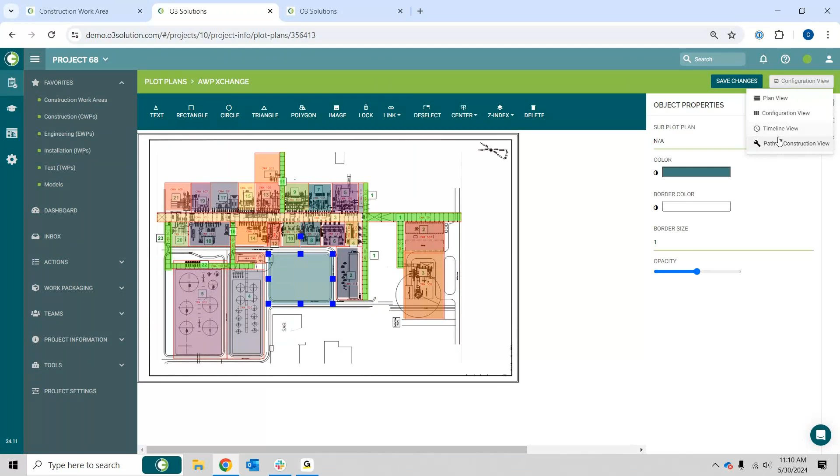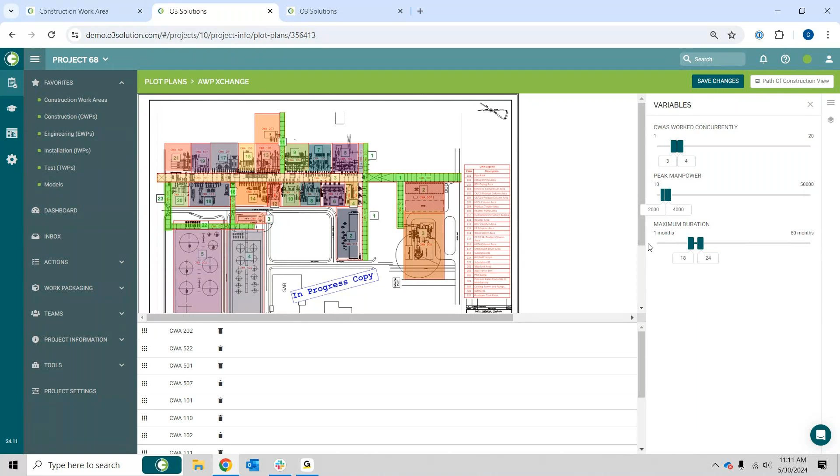Once we have our boundaries defined, we can swap over to our path of construction view to create the first path of construction. Here we select our rough sequence of work that we want to execute. Once we have our rough sequence selected, we can adjust key sequencing variables like the number of CWAs we work on concurrently and the total maximum duration we want for the project.

Once we have our input selected, we can use O3 as a co-pilot to generate an initial path of construction for us to review. Users can then play through this path of construction on a day-by-day, week-by-week, or month-by-month basis and see what will be in progress or complete during a particular period.

If at any point I want to adjust my path of construction—maybe swap the order of two CWAs—I can flip these two CWAs and hit Save Changes to make adjustments. The idea here is really to take a traditional whiteboarding process and make sure we're executing it in a manner that's as quick and easy to adjust as possible. Andrew, is there anything you wanted to add here?

Most of the construction personnel I've worked with in my career have been very visual people. If you give me a 200-page schedule and say here's the order we're going to do this, or a big long written document with the plan written down, it's very hard to visualize. Whereas having this early phase path of construction as a visual tool, something you can easily modify and play through, saying well hang on, let's pause it there, gives us a great amount of flexibility and intuitive understanding of the intent.

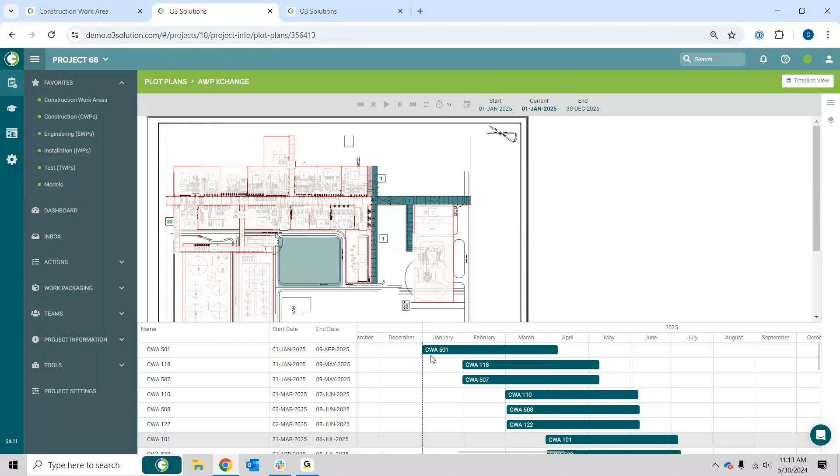So once we have our initial CWAs defined, we can go through and break these down by discipline to create construction work packages. Here down the left-hand side we have our list of construction work areas, and across the top we have whatever disciplines we've defined for our project. Here we define which disciplines are applicable for each construction work area, and use this to generate our CWAs, CWPs, and EWPs.

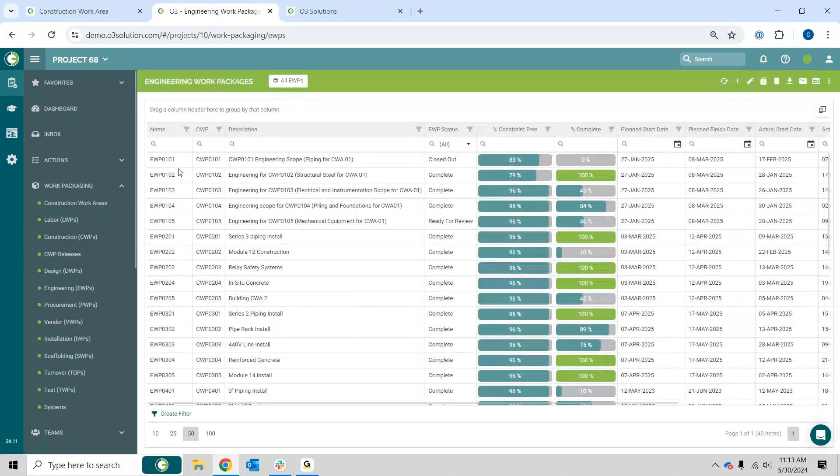As we go through and generate our construction work packages, we also generate corresponding engineering work packages. On the engineering work package side, for clients earlier in their AWP journey, this can be an easy way to group engineering deliverables and understand the progress and completion of engineering and readiness for construction.

Here we'll pull in the MDR of our drawings and documents and their relationship to the EWPs to define what documentation needs to be delivered for each engineering work package to be completed. From there we interface with the document management system and EDMS to pull over progress and status information. This gives us a good view of where we are in the progress of each EWP, making sure we understand our current status and whether we're ahead of or behind schedule, and whether we'll meet our need dates for construction.

From here, the next piece is to go through and consider potential constraints on engineering. The idea is to look out for any potential blocking items on engineering and move this from a finger-pointing and blame exercise six months after work has begun, to a more proactive conversation about what we can do to remove those blockers and make sure engineering can be successful.

These can be anything from geological surveys, geotechnical investigations, information we're waiting on from a vendor, concurrent engineering activities, open RFIs or technical queries, or input from the owner. Any of these can be tracked as constraints and removed to make sure our engineering work is successful.

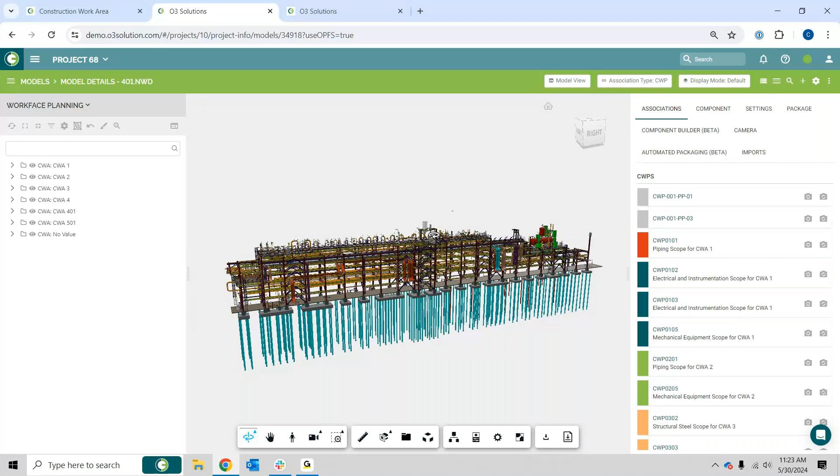Thank you, Chris. So as we have all this data combined in our model, our planning teams can come in and add, create installation work packages, and build out their scopes of work. As a workface planner, I can come in and my hierarchy on the left-hand side will automatically reorganize around construction work areas, then disciplines, then construction work packages, and installation packages.

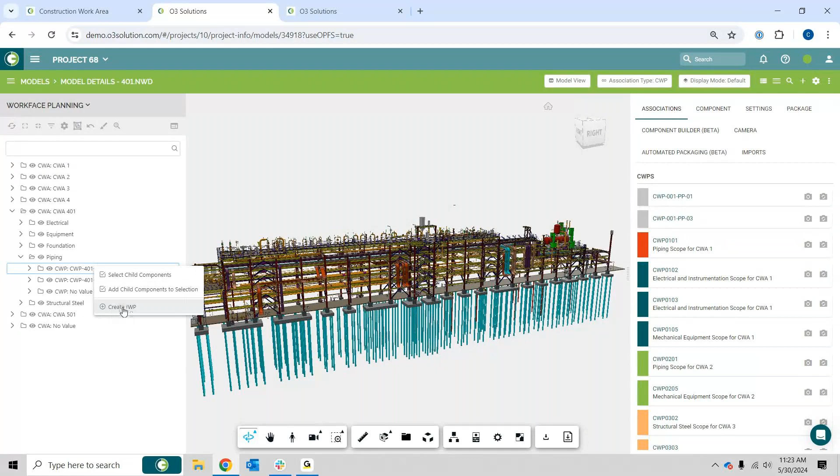I can go through and spin up a new IWP quickly and easily. As I create this IWP, the 3D model automatically filters to the components on my parent CWP and gives me color coding: green if these components are available to add, blue if they're on another package, and purple if they're already in my package. I also have additional status visualizations that give me information on material availability, fabrication availability, and drawing availability to help guide that process.

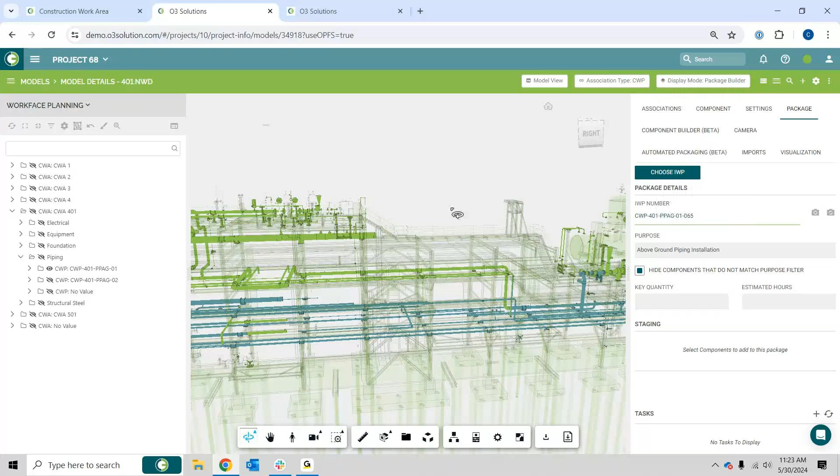From here, I can select individual components or do a bulk select to try to grab about 1,000 hours worth of work, or whatever my crew shift is. For creating these one-off packages, I can go in and select the components, add them to my IWP. Then, as you'd expect in a modern packaging tool, this brings in all the associated materials and drawings that we need, picks out the right tasks and the right quantities from the 3D model in order to do our estimation, and really automates a lot of that initial planning.

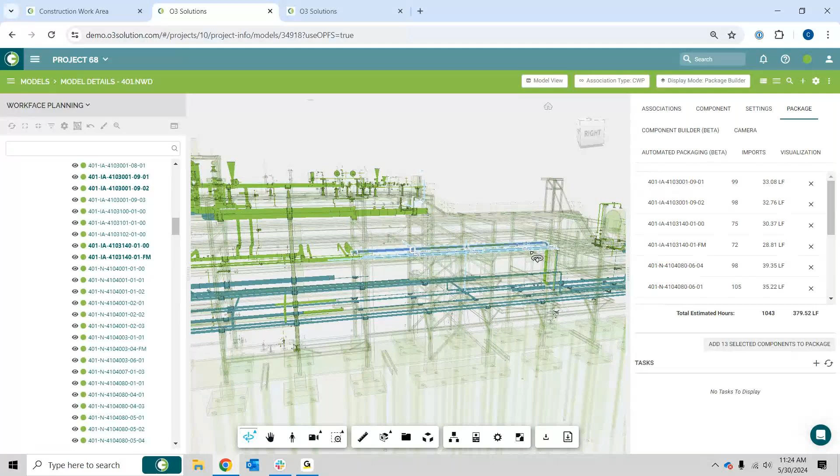Within O3, we can also take this a step further. For some disciplines like piping fabrication, we can go through and start to break these construction work packages down into installation work packages automatically. The goal here is to provide a co-pilot for the workface planner to help with that initial CWP breakdown. So here I can go through and pick a construction work package and break this down for fabrication.

We can give it a target IWP hours and a tolerance, and then determine whether I want to make sure that all of my drawings and materials are available. Once I hit the Generate Packages button, it'll give me suggestions for different groupings of IWPs within the CWP in order to begin doing my planning. I can go through and review this, make sure the breakdowns are appropriate, and then use this to quickly generate my packages.

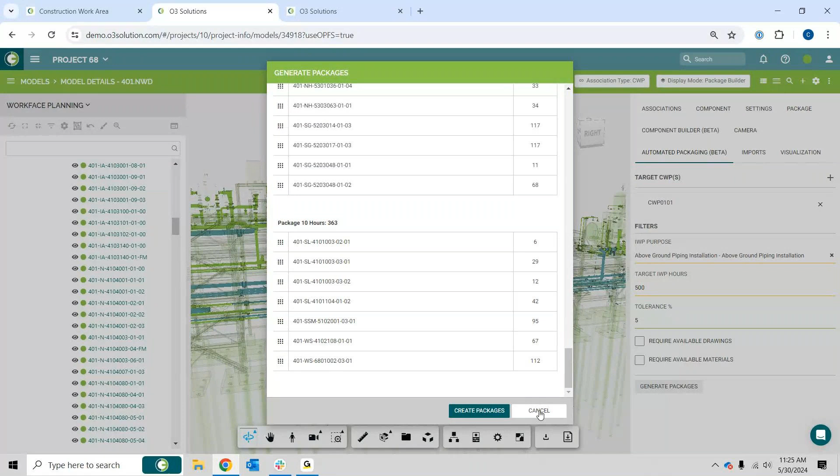For disciplines like piping fabrication, the specific constructability guidelines are less of an input, but as you can imagine, with things like steel, there's more logic behind this as we work from the primary steel structure to secondary to tertiary, work from the bottom to top, left to right, and other logic in the background to make sure the auto planning is useful. Andrew, is there anything you wanted to add around building these packages from the model, either manually or automatically?

Yeah, so most of what we do with workface planning is the planner trying to make the work of the field crews efficient. Most of what we're trying to do by digitizing this is to make the work of the planner efficient.

So we're trying to get away from the days when a planner had a stack of drawings sitting on their desk and had to leaf through them doing manual material takeoffs, manual quantity takeoffs, Excel spreadsheet man-hour estimates for the IWPs, and typing up information for the materials team to have a pick ticket. All of that becomes digitized and embedded within the tool.

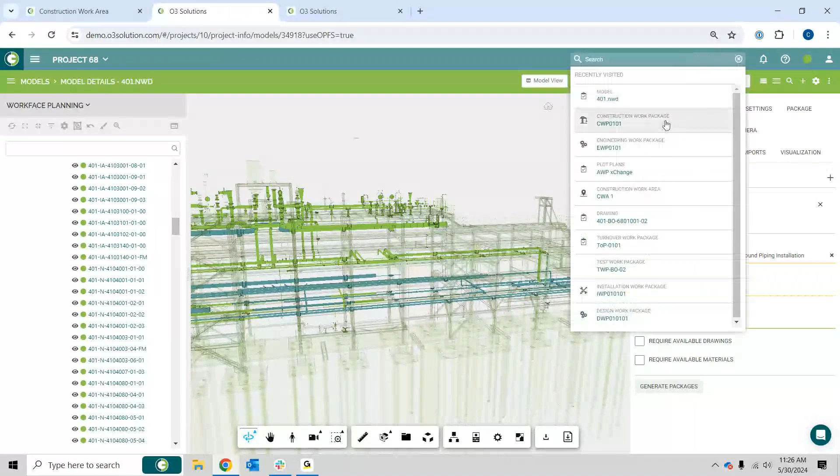So if I select 3 or 4 isometrics and click Add to IWP, the system will automatically pull the correct drawings, create the material list, estimate the man hours associated with it, create a list of constraints, and create the execution tasks. All of that is done automatically because of the setup of the tool. So the work of the planner becomes much more about managing and overseeing the execution of it rather than having to do a bunch of tedious work to build these packages.

Thanks, Colin. Thank you, Andrew.

So as Andrew was alluding to, the initial creation of these packages is largely automated. From here, we can go through and add additional information that might be needed, additional safety documentation, quality documentation, and additional notes and references as needed.

From here, we go through and do automated constraint checks, interfacing with the materials management system to make sure that all of the materials are available in sufficient quantities. We don't have a materials management system in play, but O3 can consume your material inventory data and do that constraint analysis for you.

We also interface with document management systems to go through and make sure all of our documents are available in IFC and can be included in packages. We can interface with things like permitting, and we'll do some automated checks to make sure that our scaffold requests are closed out and that scaffold is available.

Additionally, we'll check for any incomplete predecessors and can go through and create standard constraint lists with the appropriate assignees for other things like crane availability or equipment availability, to get appropriate input and buy-off to make sure that our work can hit the field without delay.

From here, we can move through a standard approvals lifecycle, make sure that this work is ready to go, and then it can get issued to the field in the form of an IWP.

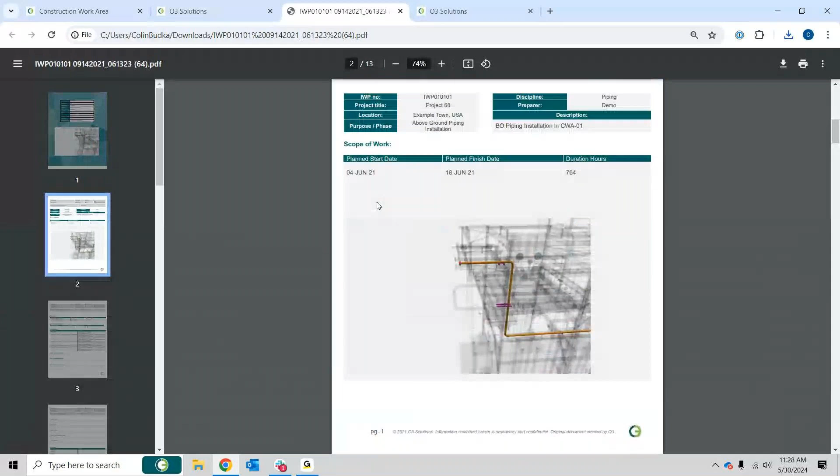These IWPs can be issued out electronically or printed out as a paper copy, and these can match any look and feel that you like. They can include everything from manpower lists, material lists, work steps, specialty tools and equipment, and the drawings needed for execution. Any of the information that you have within the system can be brought into these IWPs.

Once the IWPs are issued out to the field, we can receive feedback. This can be in the form of progress data, behavioral-based safety observations, and any delays that are encountered in the field. We can also go through and generate punch lists for anything that needs to be executed later.

We can collect these either electronically directly out in the field, or we can work off of a paper copy or PDF copy of the IWP, write our progress and field updates directly on it, and take a picture and use AI and OCR tools to automatically convert that into progress information. So if you have devices out in the field and are ready to do this electronically, it's fully available. If you are working off of paper, we can still go through and leverage some of that same automation.

Chris, is there anything you wanted to add on the IWP process?

I'd just like to highlight that AI functionality within the software. Back when we were in construction in the fields, what we would see a lot of is a mixture of tablet forms, but not everybody had a tablet. Being able to utilize the AI functionality and OCR, taking a screenshot of that progress, allows the project team to keep up to date with the progress tracking, and allows you to get that instant feedback from the field on a daily basis, so you can know exactly where you're at with your project, as well as any kind of constraints that may be coming up on the project.

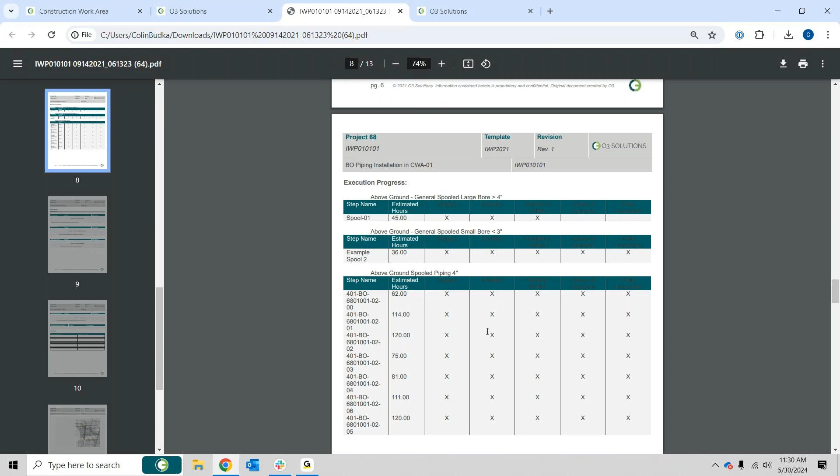Thanks. Thank you, Chris.

So as we wrap up our IWPs, the progress information and field feedback also rolls up for reporting. So both through dashboards and also through the 3D model, we can see key information from our project.

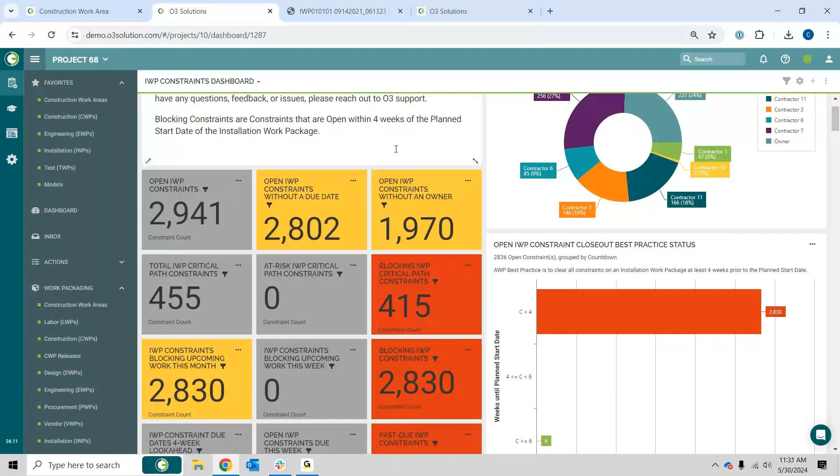I can set these up from a Workface Planner's perspective to look, for instance, at my particular subset of IWPs, understand where I have constraints blocking my critical path, and anywhere I see a KPI that has an issue and is turning red, I can simply click to drill down to the underlying data and take direct action.

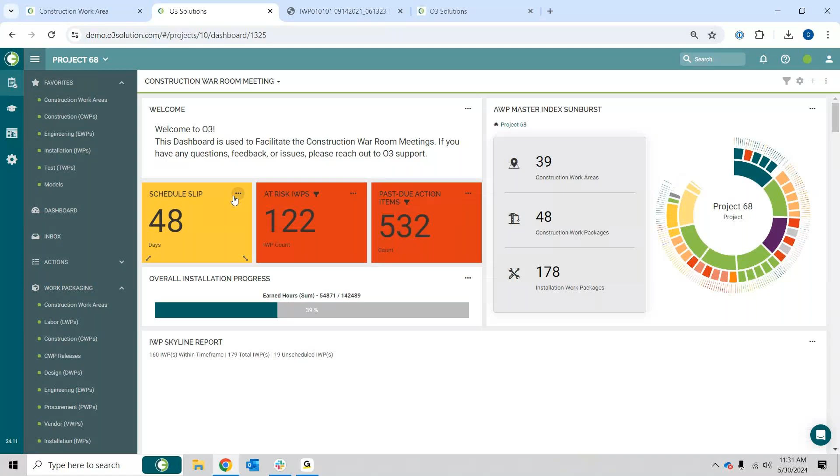I can also use my dashboard reporting at a higher level, so I can view this from a construction manager perspective, understanding higher level progress, things like my S-curves, things like skylines, and understand at a higher level whether my project is trending in the right direction or if I'm having potential issues. I can also look at things like productivity factors. The idea here is to really identify any potential issues or exceptions and go through and take necessary actions to add more training or a more thorough constraint management process, or do what I need to in order to fix any productivity issues in the field.

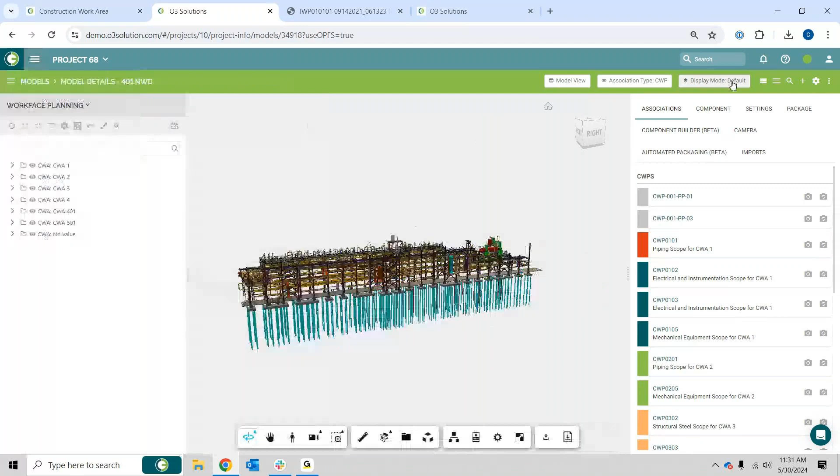This is also available directly within the 3D model. So within my 3D model, I can go through and colorize according to things like my work package status. I can also look at things like where I'm blocked by constraints, where I'm making progress, where I have fabricated but not installed, or installed but not yet tested pipe. I can look at things like verticality, potential verticality concerns, where I'm ahead of progress or behind progress.

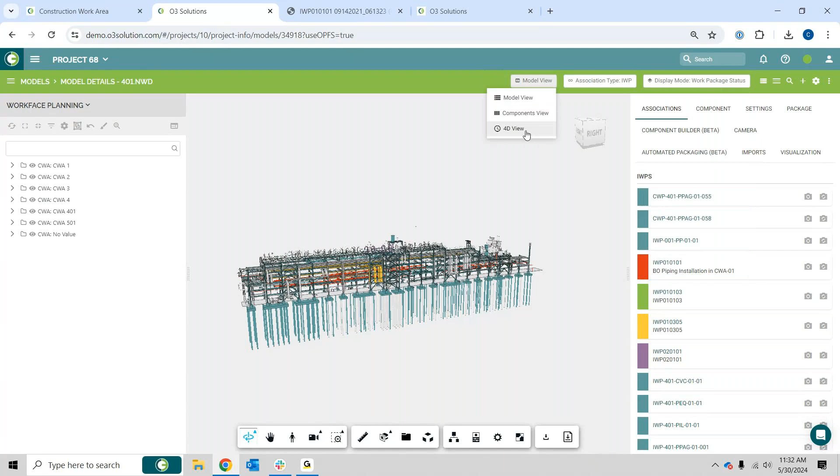And I can also see these same things from a 4D perspective to look at things like progress and my work plans on a day-by-day, a week-by-week, month-by-month basis, and play back through these plans to see what will be in progress or complete during a particular period.

Using these display modes, I can also determine other visualizations, so things like plan versus actual start, verticality or height issues, my work package development lifecycle, and other key reports.

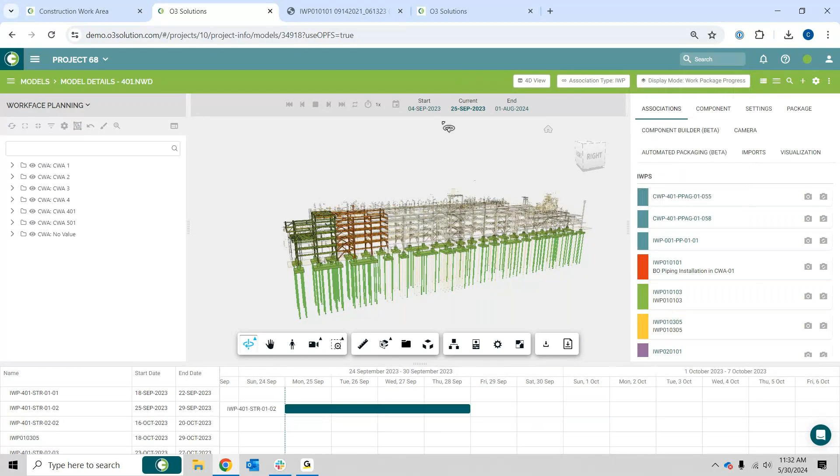Andrew, is there anything you wanted to add on the reporting front? Yeah, a couple of things.

So on the dashboarding side, there's a couple of major issues that we typically have with construction projects. Firstly, we get a massive amount of data. The volume of data that we deal with is absolutely huge. We're getting reports from all over the place, emailed to us about different things. It's often difficult to see the wood for the trees.

So with this, firstly, with the way O3 does it, the information is integrated all in one place, and you can see the areas of problem. Don't show me, I'm not worried about the 600 things that are going well. I'm worried about the 4 things that are going badly. And I can get that information real time. I don't need to wait to the end of a 2-week shift of work and have the contractor send me a report on the Monday that we meet about and talk about on the Wednesday, by which time half of the things that we're discussing are already too late.

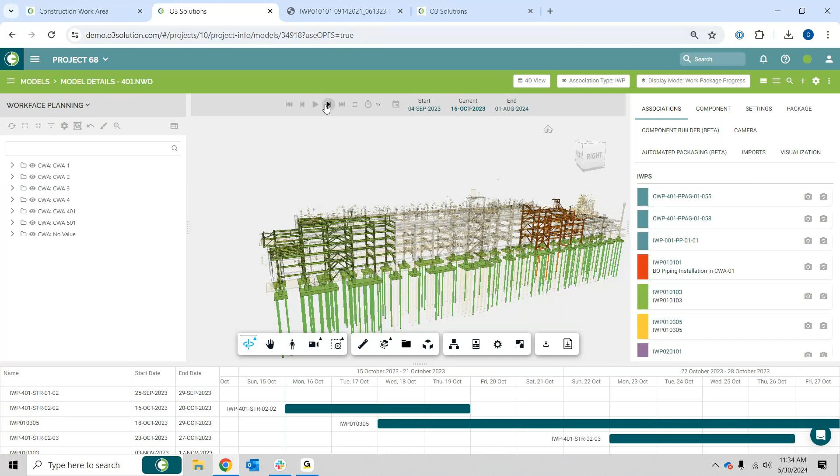And then on this model side, this is another one of those great visual tools where information is much easier to consume on a visual basis. So if I'm doing a daily coordination meeting on site, I get my various crews, my various subcontractors. What are you working on? Which areas are you working? Are you guys tripping over each other? Do we have SimOps issues? Are we having concerns about whether operations is going to let us into that area next week?

Are we, and this is my favorite, are we trying to put cable tray on steel that isn't erected yet? So we can start to see some of those execution issues where the electricians think that they're going to be able to hang cable tray in midair kind of thing. All of this, again, much, much easier to see and understand and visualize when you can see it in this format. So I've literally used this as the basis of daily coordination meetings, put it up on the screen and let's talk through the plan for tomorrow, for next week, for next month, and everybody can see what's coming at them. Thanks, Colin. Thank you, Andrew.

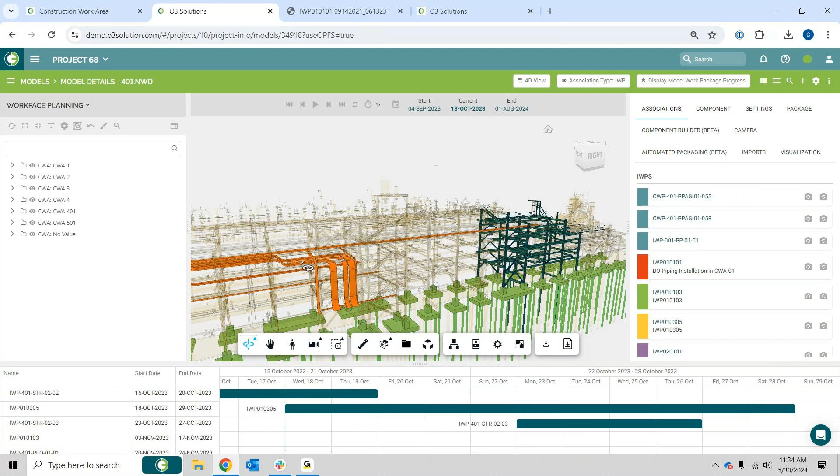So as we move further into our construction lifecycle, and as we start to finish some of our systems, we can flip from a workface planning view to a testing view. So this changes from CWA, CWP, IWP view to more of a system, then subsystem, then TWP, line number, and ISO view. The idea here is to start to package this by system.

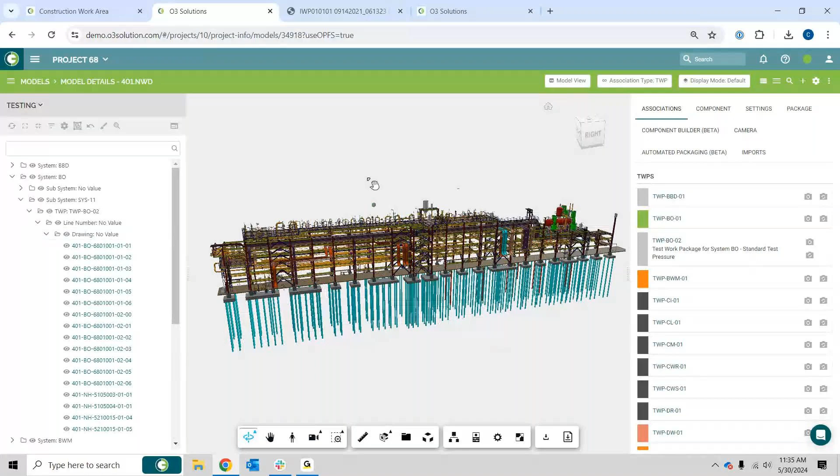Just like our IWPs, our TWPs are automatically going to pull in the associated materials, the associated drawings, and the necessary work and tests that need to be completed. And we can interface on the test work package level with systems that are completing ITRs. And later on in turnover packages, we can associate with systems where we're going in and doing our check sheets.

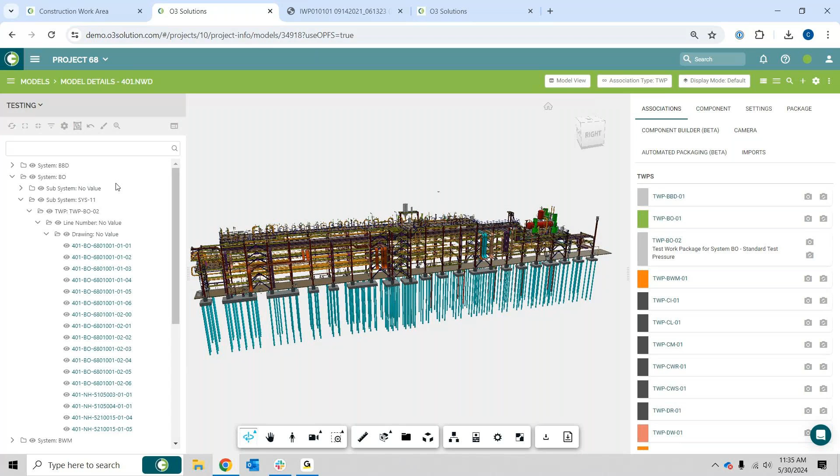As I go through and add my components to my test work packages, I'm automatically going through and linking these. The system is automatically linking the same work that's in the test packages and the same work that's in the installation work packages. So if I have my pipe spools for the system being installed across 5 or 6 IWPs, those IWPs are automatically added as predecessors to my test packages and my systems.

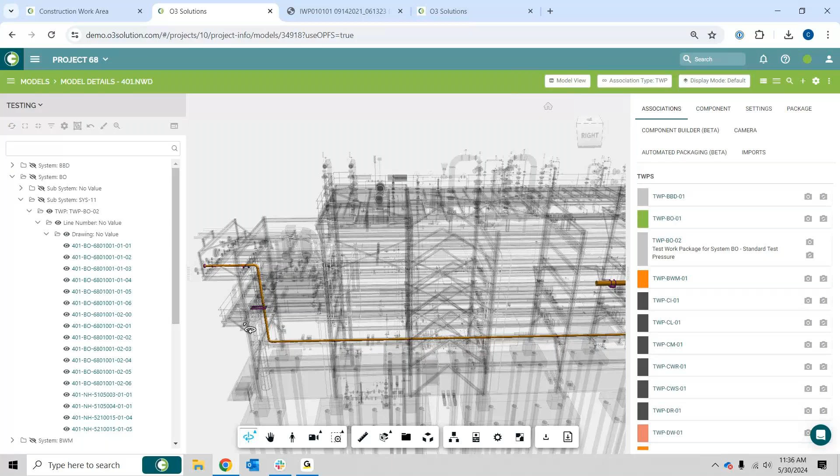So from my test package perspective, I can go through and understand all of the installation work that's leading into my TWPs, and understand if it's proceeding according to plan and if I'm going to have any potential issues. At that point, I can either rearrange my IWP schedule to support our testing plan, or decide there's going to be a potential delay and adjust our testing plan accordingly. This gives us that powerful view to understand the handover from area-based construction to testing and whether we can meet our testing plan.

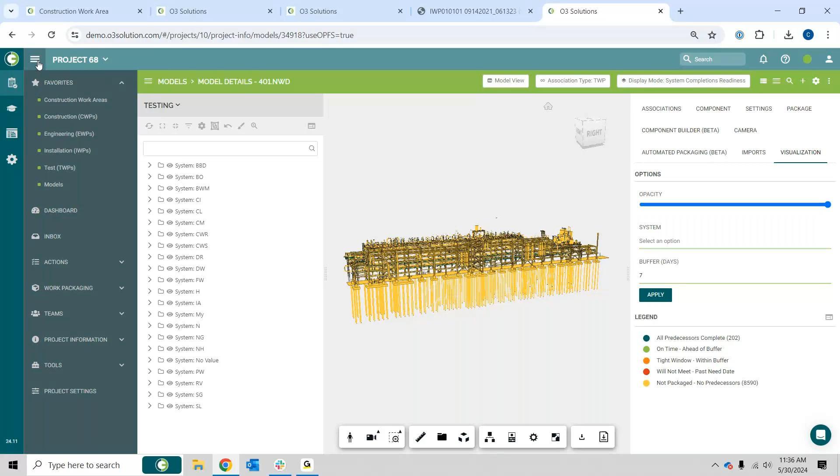Likewise, as we continue on, we can also flip over into different status visualization views, looking at things like the transfer of care, custody, and control dates, and seeing if all of our TWPs, system, and IWPs are going to meet the need dates for handover of our systems. Are there any areas where we're going to have a tight buffer? Are there any areas where we're going to miss the dates entirely? Again, that identifies potential issues so we can decide whether to rearrange our execution priorities or have those clear and honest conversations about what's going to be late. Andrew or Chris, is there anything you wanted to add here?

The value of this is we always talk about that magic number of when we transition from bulk construction to system-based—I've heard everything from 60% to 75%. Because we manage this at the lowest possible level, right down to the construction component, every element within that model has a CWP and a system number. That means we can do bulk construction for as long as possible and still do it efficiently, but with a view towards how it impacts system turnover dates. So you can construct as efficiently as possible for as long as possible, but if you need to pull a few elements out and create a system-specific package to finish on time, you can do that. Most of the trouble we have meeting turnover dates is just visibility of the downstream components and their status. All of this gives you that information right on the screen and ties it together from the IWP to the test pack to the turnover.

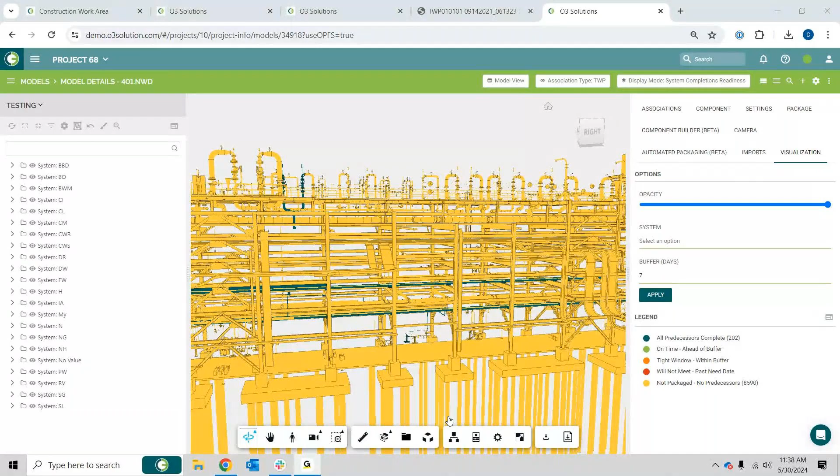All right, so there's three main key takeaways we want you to walk away from this webinar with. One: O3 is a software solution dedicated to supporting the full life cycle of a project, from the early stages—not only detailed design, but prior to that, whenever you're trying to figure out your path of construction, whenever things are not as visible or fleshed out as they would be in a typical construction project—all the way to the system turnover and completions process. It's about being able to visualize that data and take proactive actions on those constraints or tasks to move things along, essentially becoming more of a driver of the project rather than just a process we put things through.

The intent about highlighting those constraints and typical processes or holdbacks from projects is to bring them up to the surface so meaningful action can be taken upon them, so we can drive that to completion. Whether you're using an agile methodology or a waterfall approach, either one will work using the software. But what we want to do, the intent behind O3, is to produce a collaborative environment where we can highlight those issues and constraints and solve them as a group or as a team.